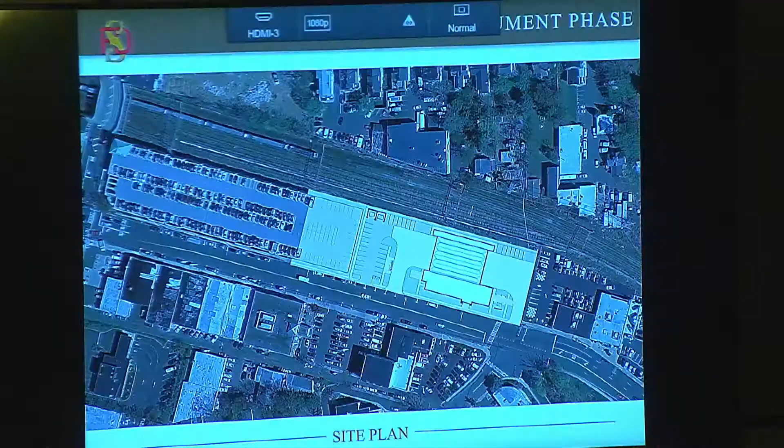So let's run through an update of where we've been. Make sure the technology stays with me. Most people are familiar with the site over on Broad Street, adjacent to the parking garage and occupying a portion of the current commuter lot.

As we zoom in, for those that understand a bit how the building is going to operate, we're taking advantage of that intersection as the primary response point. There will be 4 long apparatus bays. One key design feature we worked on early with the team was accommodating and housing the entire fleet of vehicles so everything can be protected from the weather. They're slightly longer than average bays to accommodate all those vehicles indoors and protect and support them over time. The primary response heads to that intersection to allow easy access in multiple directions and quick response throughout the city.

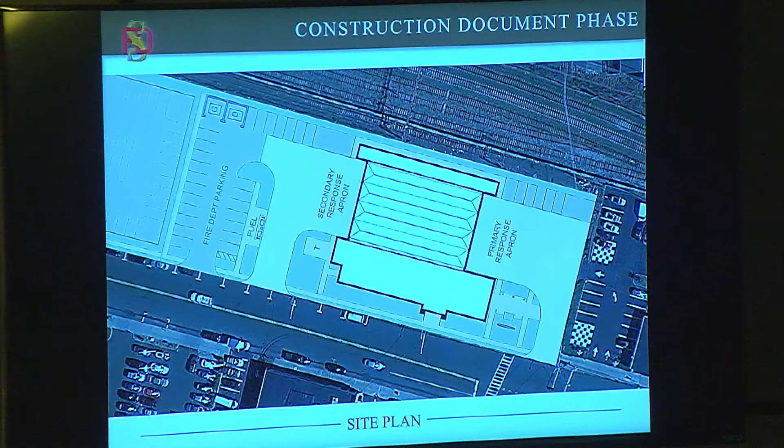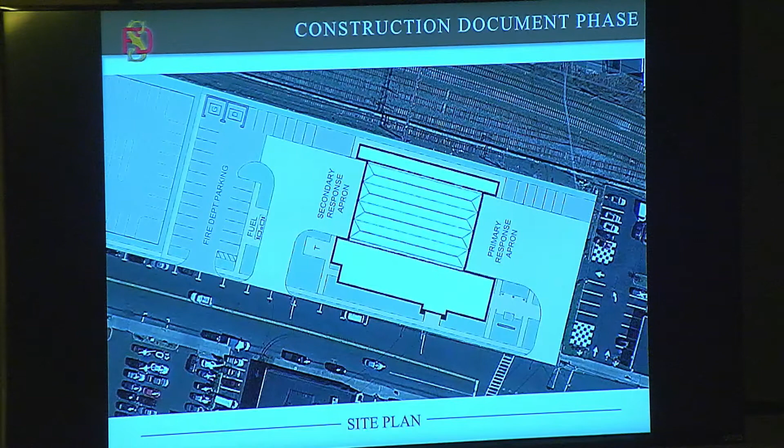There's a secondary apron out the rear, so it's a bi-directional station, if you will, for the secondary reserve and other support vehicles that can come out the rear. You also see the identified location of the fuel station that will support both the fire vehicles and, as we understand, be available for other city vehicles as well. There's dedicated fire department parking adjacent to that, and then continuing west you see the edge of what will remain of the commuter parking lot.

We've had to update and continue to evolve the station design itself. One key aspect we've worked on with the full firefighter design team has been how to best approach decontamination. Our firm has taken a strong leadership stance in the industry on fire station design, what we refer to as hot zone design, which separates out and identifies areas most likely to be exposed to the very serious carcinogens and contaminants firefighters are exposed to in their work, and how we identify, protect, and isolate that within the building, providing specific transitional decontamination areas where they can become clean and have the opportunity to shower.

One important catchphrase is shower within the hour, so there's an opportunity to shower and change clothes as soon as they come back from a response event. Here, both because of the nature of the site itself and our hot zone strategies, the majority of those red zones, or more potentially contaminated spaces, are on the first floor with the apparatus bays where the PPE is stored, fully isolating and separating the upper levels, which remain clean, green spaces for the offices and day spaces.

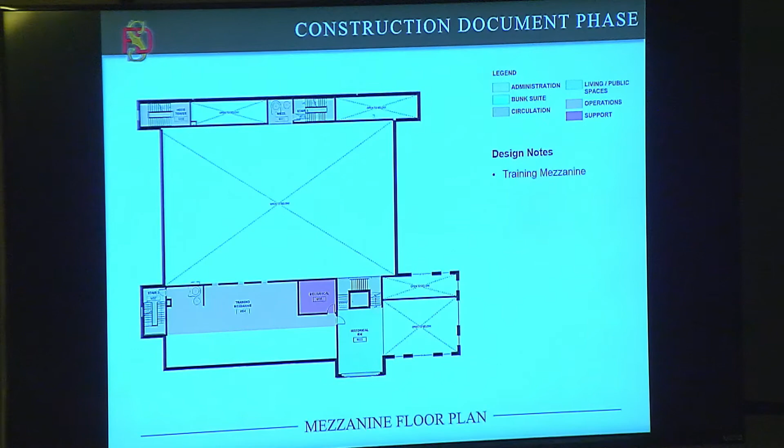We have also provided at the mezzanine level an opportunity for some training space. This is something we take very seriously—firefighter preparedness, both in regular physical fitness activities and specific drills and opportunities to practice on site, without taking somebody out of service or taking a vehicle out of service. So we have an open mezzanine that goes into the bays where they're able to practice ladder evolutions, specific drills, Denver drills, and other very specific activities and scenarios they may experience in the field, directly adjacent to the bays on this level.

The upper level, second level above the mezzanine, is the primary house day space for the firefighters, as well as this being the headquarters building, the new headquarters offices for the chief and staff. One of the other key features, in yellow, is the multifunction training space and EOC. It's a space that will be set up and operated as an emergency operations control center for the city, serving a dual purpose as both multi-use space and a training center.

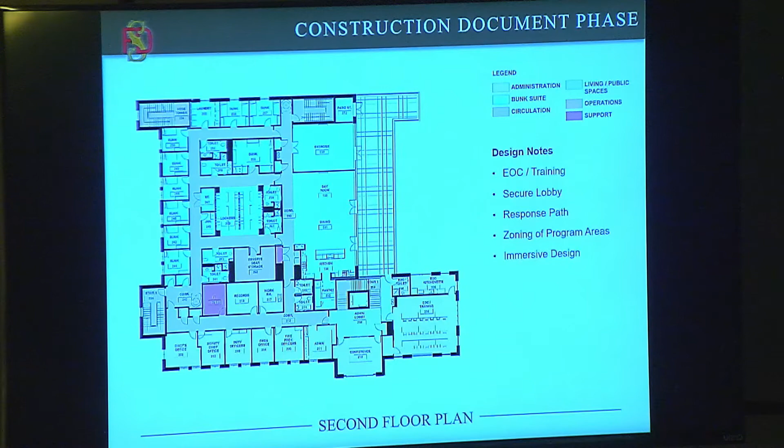Upper level roof plan, again achieving the earlier design comments and aesthetic—the hip roof aesthetic you see from the street—surrounding a mechanical pit that's screened by that roof at the center.

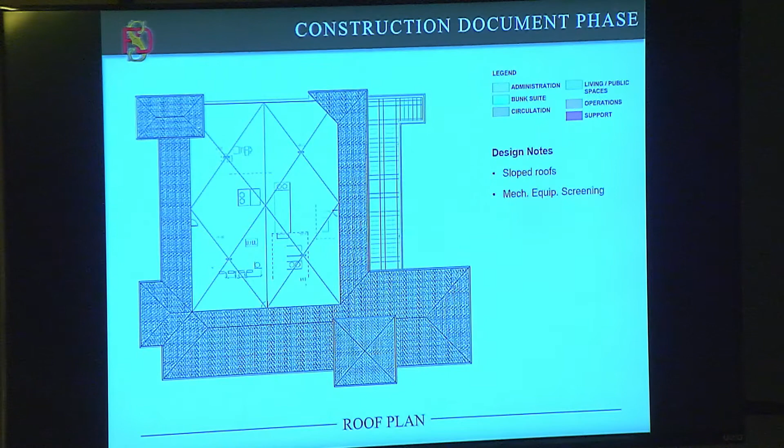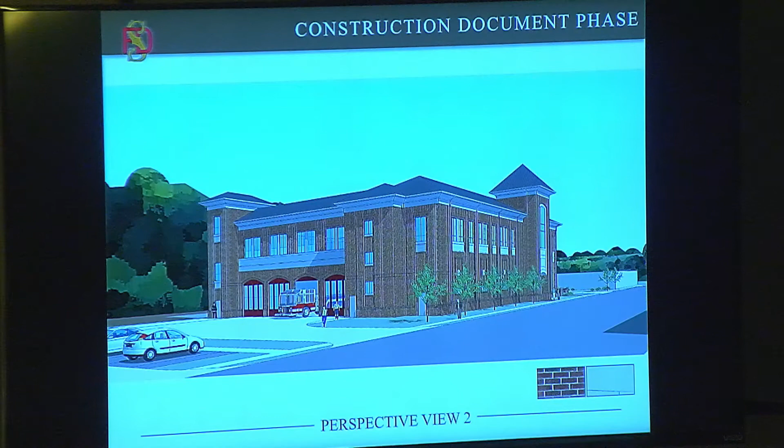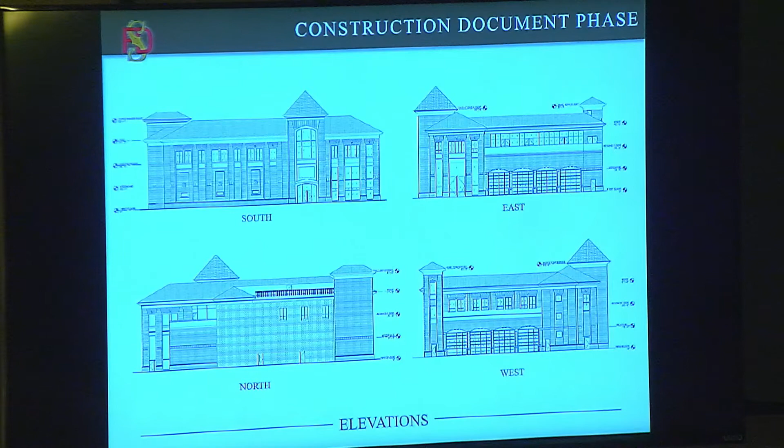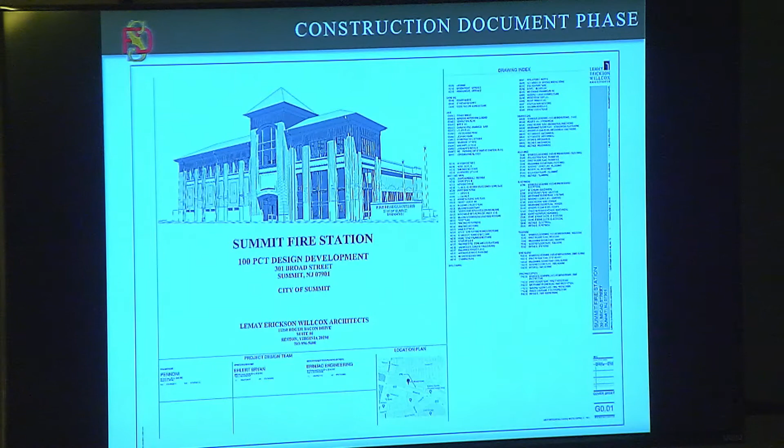As we move from schematic design to design development and now into the construction document phase, we've resolved the majority of the design questions. The systems are understood, and we're beginning to package the bid documents that the contractor will bid and ultimately use to construct. These are some of the elevation drawings from that set, and we'll continue to piece out all the details—roof details, building and wall sections—that become the final bid documents, what we used to call blueprints, for your team.

Schedule-wise, a quick review of where we are: the CD phase officially started in mid-December and we'll be wrapping that up in June of this year, then moving into the bidding phase. We're currently working with Chief and procurement on the bidding schedule details—those are preliminary dates, but we're targeting midsummer for bidding and permitting, sequenced per city protocols, with construction targeted to start at the beginning of probably the fourth quarter this year. We anticipate a building of this size takes about 14 to 16 months. Chief and I were just discussing how to plan for weather delays and other realities of construction, so we're allowing for a 16 to 18 month construction period.

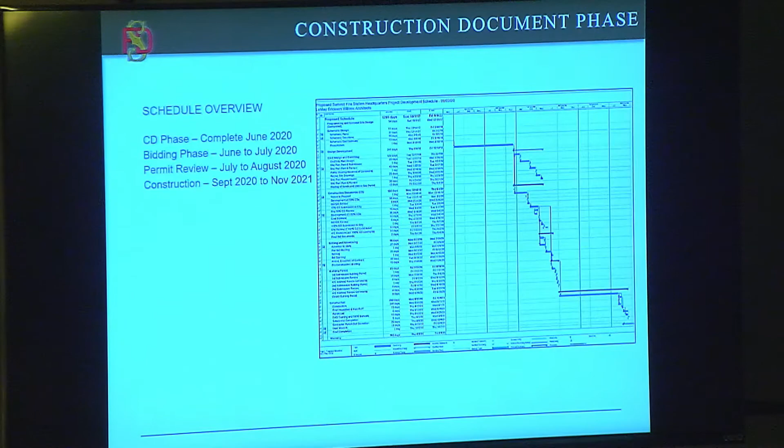With that, I'm happy to answer any questions about the materials I presented or anything else about the project. Does anyone have any questions?

Councilmember Naidoo: Are we discussing cost estimates? Aren't we discussing cost estimates for the building? Yeah, let's talk cost estimates—that's the biggest thing. So why don't you go through and talk to us about what you have right now as your cost estimates?

Chief, do you want to talk about that a little bit? Yeah, so right now the building came in—our budget was $11.8 million, and we came in just about $110,000 under budget. The building itself was about $11.3 million, and with the fuel systems in place, everything brought it up to about $11.7-ish, around $11.6 million for the whole entire building to be built.

That also takes into consideration architectural costs, contingency costs, escalation costs to bid, and those things that are normally in a building of this size and nature. There's a more detailed, broken down cost estimate that we don't show, the kind of detail that council and safety have, that goes over every little area and how we got to the price. But long and short of it, it's about $110,000 under the budget that we currently propose for, $11.8 million.

Let me just follow up, because we have seen cost estimates, and I think it's fair to the public to understand where we are, since this is public money, right? So let's just talk about it in a little bit more detail. One of the things is the cost estimates assume about $333 per square foot for construction, right?

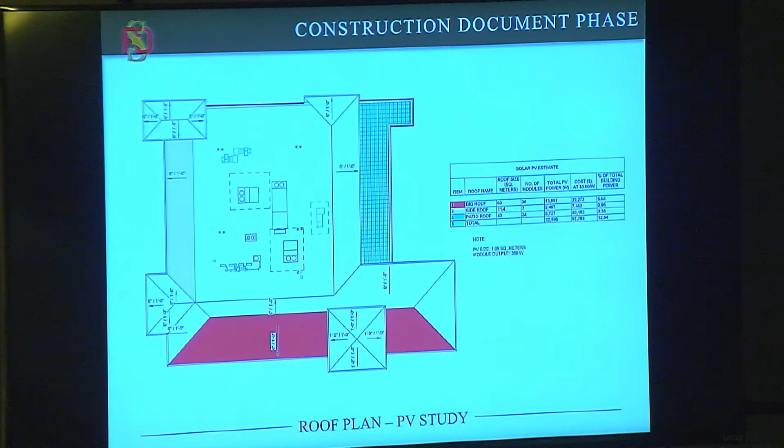For municipalities whose procurement allows them to require experience in a specific field, different groups have different requirements in what they're allowed. We do like to require, as part of the bidding requirements, that they have built a fire station within the last 5 years or something like that. We recommend that if and when you can, since there are complexities unique to the equipment, especially around the bay areas, that are complex. But more often than not, the municipalities we work with aren't able to do that, and it is general contractors coming in without necessarily past experience. So it can be done. We recommend, preferably, someone with experience with a fire station in the past, but our job is to provide documents to make sure somebody can build it. That anybody could build it? Yes.

Okay, thank you, that's it. Any other questions from council? Any questions from the public? Come on up.

Hi, Eileen Kelly, 47 Woodland Avenue. Thank you both for your presentation. Just a quick question about the anticipated ongoing costs of this building compared to the older building, given that it's newer, there's a facade—anything you can comment on the thermal envelope of the building that would potentially incur costs in the future for maintenance?

Great question, I can't give you a specific dollar comparison. We were involved in and completed the existing facility assessment of the current facilities, which, as many know, were built in 4 stages dating back to 1902. The majority of the building has practically no insulation in the walls, as a simple observation. So we are meeting and exceeding all the basic code standards, and we're actually not pursuing LEED certification per coordination with the city, but we're basically designing it to those standards anyway. It's how our office operates, it's not additional cost, it's just good detailing and smart design. If you want further information that gets into the details of the comparison, we could work with our mechanical engineer and give you some of those numbers. But in terms of a highly efficient building, this is meeting what would be comparably a LEED silver status building in terms of overall efficiency, both in mechanical systems and the insulated envelope.